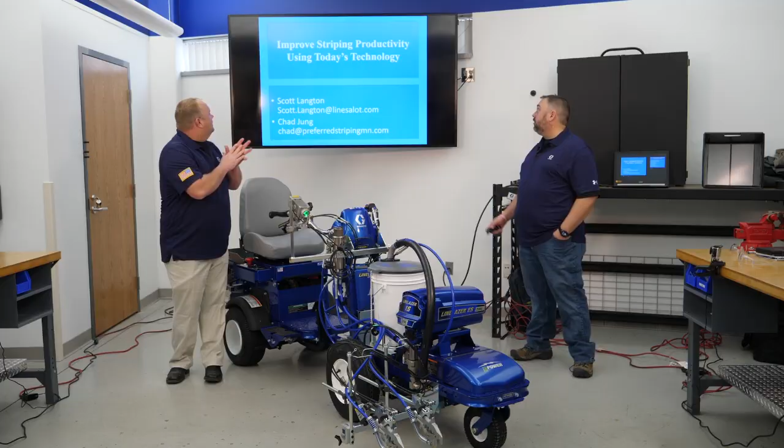So today, this is basically the outline of the presentation: improved striping productivity using today's technology.

We're going to cover a little bit on the electric stripers and drivers, the new two-color machines, the dot lasers, and the line generating laser.

Some of the other stuff we'll talk about is auto layout—big fan of that, used it for many years now. Auto guns, been using that quite a bit. Line drivers have been around a long time, but there's still people out there not using them. And then apps and data logging, that's new as of last year. We can now download all the information off the machine onto a computer pretty easily.

This is just an example of one job where we used the auto layout machine and auto layout lasers. In fact, this was a unique job because of the way the layout was done—we didn't even pull a tape measure on the entire job. We used the auto layout to measure our drive aisles, the laser to establish our baseline throughout the parking lot, and then auto layout to measure and divide.

This was one of the jobs where, at the end, we looked back and saw what an amazing feature the line generating laser could be for us—see how you could keep them so straight over such a long distance. Made a big difference, cut our time in half by using the auto layout. This was one of the first ones we did, probably 6 years ago.

So this next video is just an overview of the old way versus the new way. We did that for many years—we would follow that string line. Some people chalk line, some people use string line. That's just how we learned, using a string line.

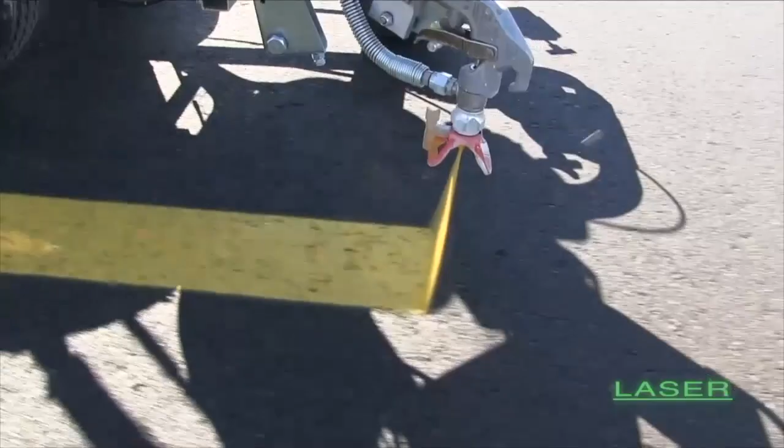This job was right here in Otsego, about 5 minutes from Graco headquarters. That string line there is obviously not a production-made unit—it's handmade, and we just had to come up with something because we wanted almost a quarter of a mile of string on one reel, and that's what we made.

A lot of people would probably use a chalk line to snap those lines with chalk. We actually just followed along a string line—put the string down, paint the line, move the string over, paint the next line. Now we've eliminated that, and instead of moving the string, all you've got to do is move your target.

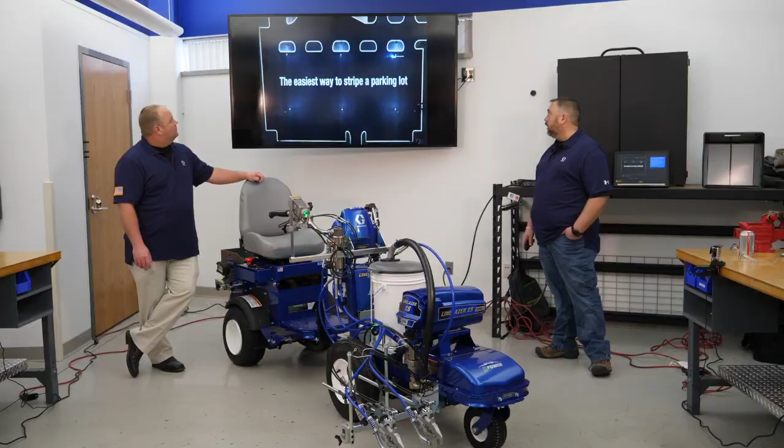This is a job we did—as you can see, it's 5 doubles, so there's no shadow box or target box at the end of this. I'm just using my auto layout marks to connect all these dots with the laser. You can see the sun's just starting to come up, but it's a nice, easy, quick way. And the quality improves—amazing. You get all your starts and stops.

Once again, everything that was done there was done with the auto layout. We avoid tape measures, string lines, and chalk lines as much as possible. If you have a guy on a job, you can put him on a machine with a laser, and every guy on the job is actually producing for you rather than having someone just there to move a string line or chalk line.

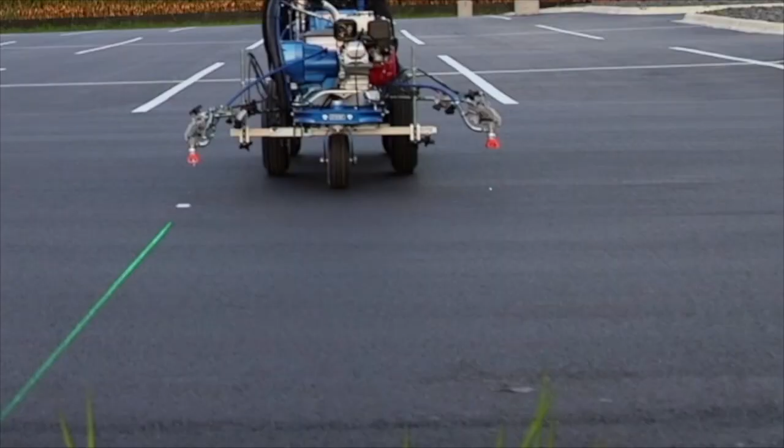The new line lasers—you can see right there in the bottom corner, that's me still striping the parking lot. That whole job was done, and I think I was in and out of there in like 2 hours, from auto layout to finished product. Perfectly straight lines, that's the key—that's what we're looking for, straight lines and even widths of stalls.

So new this year, electric stripers and line drivers. They're very quiet—you don't have any engine noise, no gasoline exhaust fumes. So when you're working inside a parking garage, you don't have to worry about setting off the carbon monoxide alarms. No engine vibration—the reduced engine vibration actually works hand in hand with the laser because it makes the laser more visible if it's not bouncing around.

Now the new electric stripers all come with the cruise control option. So if you want to go exactly 2.5 miles an hour, you can set the machine at that and press on the foot controls, and that's exactly what you're going to do—you're not going to go any faster, you're going to go 2.5 miles an hour. So you're going to get really good mil thickness. That's what you're shooting for—you want a perfect mil thickness, and you only want to be striping at that speed.

That's what that option gives you. It's also going to give you an eco mode on the new line driver. That's going to give you all the time you'll ever need.

I was lucky enough to use this machine for about the last 6 months. Never once did I run out of battery, never once was I underpowered. I could go up and down hills, it did everything I needed it to. And at the end of the day, I loved it because it was smooth, quiet, and it always performed like it should. Never had any issues with it.

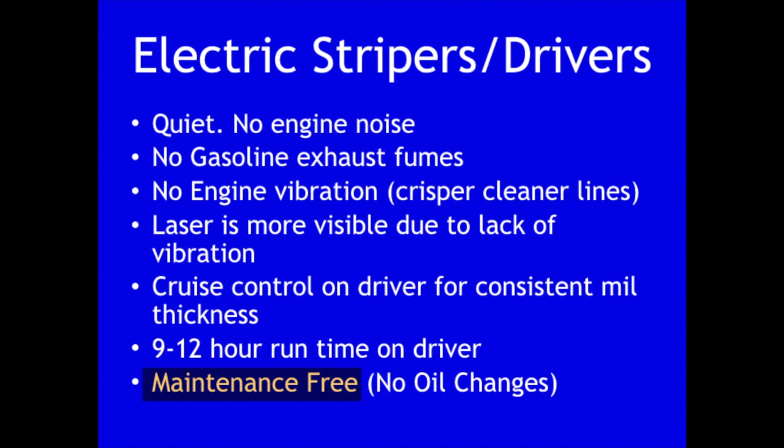So maintenance free, no gas, no oil. Just plug it in at the end of the day and you're good to go. One thing they did too is they took some technology, so every time you hit the brakes—and if you're doing singles, you're hitting the brakes nonstop—it throws a little bit of charge back into that battery all the time. So it's constantly getting a little bit, and it's using that all day long to help charge that battery.

So here's a quick video on it, some stuff we did indoors. That's it, it's running. It's as quiet as you can imagine. Loudest thing is the spray, the paint coming out.

Nice indoors. There's another job we did, 4 in the morning, had to have it done before sunrise. Look how close we are to that building—that's an apartment building, you've got people sleeping behind those windows. Yep, so no one woke up, no one turned their lights on, they didn't even know we were there. But in the morning they could park, so they were happy.

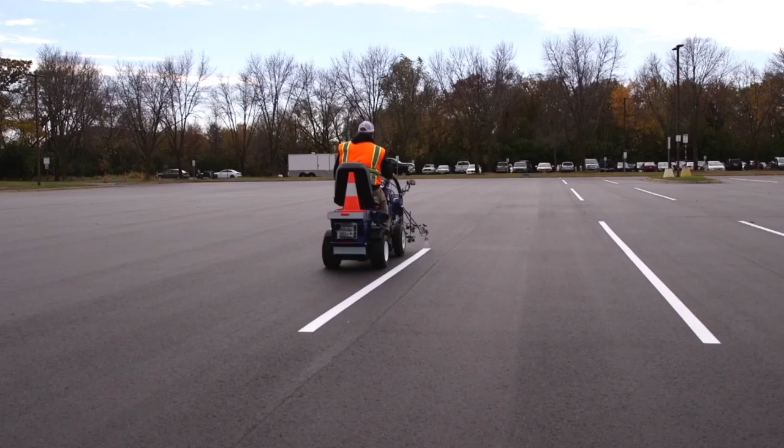Made a big difference. There you can see, middle of the day, nice and quiet. The laser was a little bit more visible because there's no vibration in it, which makes a big difference. That video you see right there, I think we stretched that laser out 5 doubles, so it was almost 300 feet, middle of the day, perfect sunny day.

There's another good picture of it, and I'm using cruise control in that one. I set the cruise at, I think it was 2.8 miles an hour. Set the machine up to paint auto gun, so it did 36 feet, gap 24. It did all the work for me, all I had to do is watch the box. Makes it nice and smooth.

So here's the two-color machine. The two-color machine is exactly that—it's got 2 pumps and 2 separate tank reservoirs, so you can actually run a white and a yellow, a white and a black. You could have 2 machines in there and have 4 colors, versus with a single color machine, you need to have 1 machine for every color that you're using.

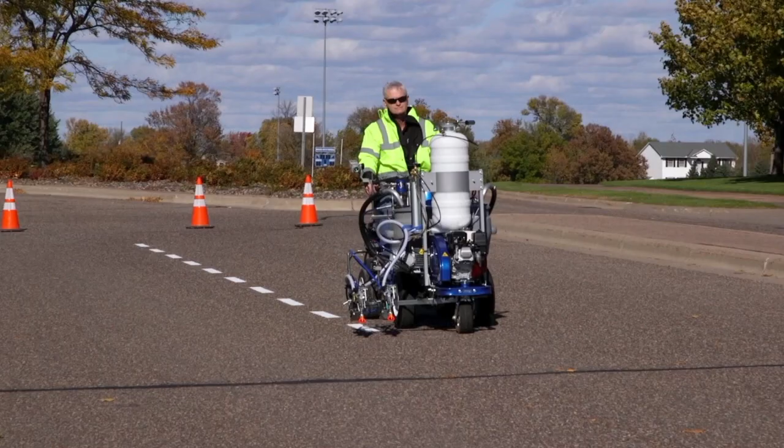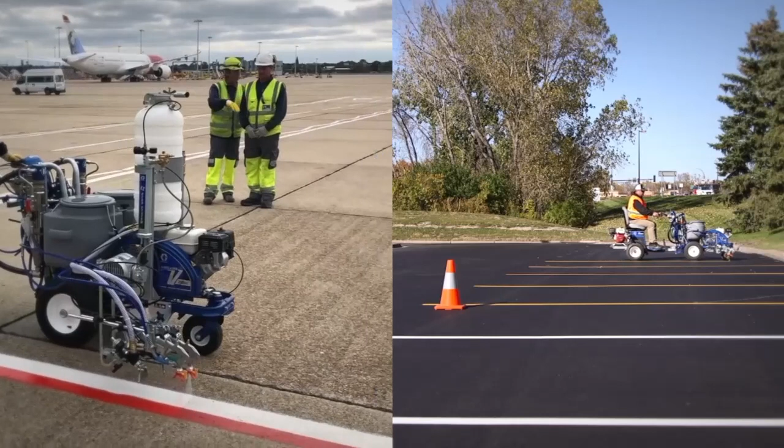The 2-color machine I found came in super handy because now I could downsize my trailer. Instead of running 4 machines, I got 2 machines, 2 drivers. That just eliminates that much weight, that much to haul around, that many things to go wrong. And you get to those jobs where, hey, they want 12 lines white, 12 lines yellow—it's right there. You're on the same machine, a couple of buttons, move a lever or 2, and you're painting a different color. You don't have to go back to the truck, swap out the machines, get a different color.

I know for years we've always wanted, hey, I want a black and a blue machine as a 3rd machine. This is an option now because you can actually have those 2 colors, keep them in your machine, and you're good to go the whole season. As well as you saw in that video, you can run that pressure bead system with that 2-color machine.

Dot lasers, it's kind of the first evolution of the laser. All that dot's going to do is put a dot on the ground and show you where your paint's turning on. But what we also use it for is to set up and align the head, and also to calibrate the machine and the auto layout for the machine. We'll cover a lot of this too in a couple videos.

Improve starts and stops—if I shut off that dot laser and put an average Joe behind that machine, I say, okay, line up on my mark I have on the ground and make sure you're lined up perfectly. Without the dot laser on, he's off by 2 to 3 inches every time. But now you turn the dot laser on, tell him to line up on that, you can't mess it up. It's a no-brainer, works perfect every time.

So here, starting the dot laser, how to set it up and align it to the head. I think we just have a short little video that kind of goes through that process. It's really, really simple—probably takes you about 30 seconds to set it up one time.

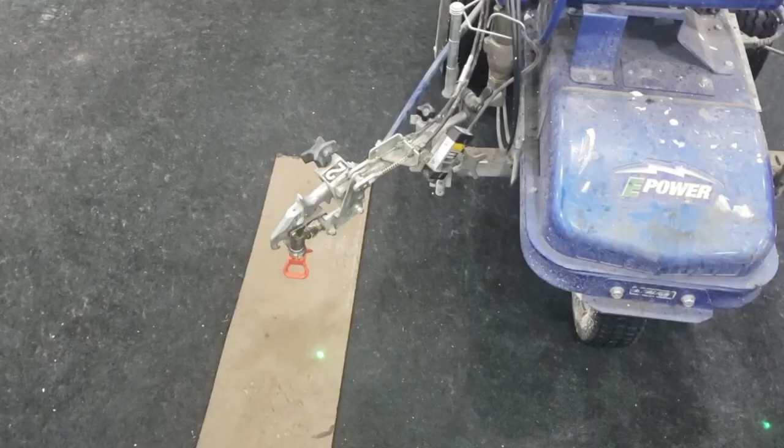So basically we just walk through on how to do it. It's a simple process. Set your machine up to put down a dot. You come over to your auto layout mode and turn on your number 2 gun, which is what I'm using here. Simply press the button and you're going to get a nice 4-inch line. We're set up for a 4-inch line, that's typically what we do.

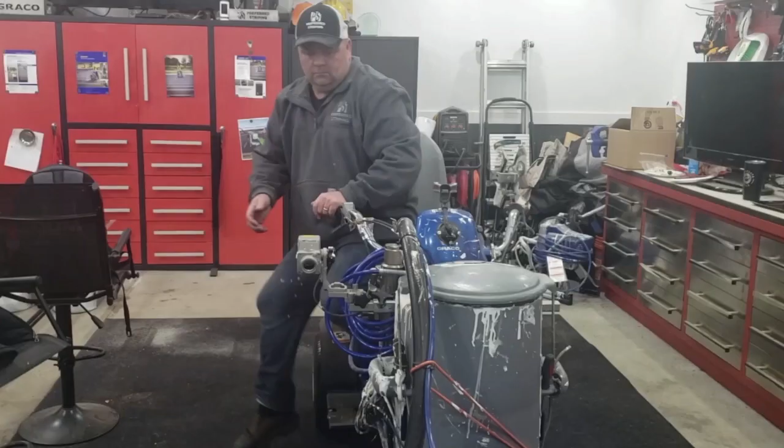Now we just go down, hop off the machine, adjust your dot laser. You want to line that dot up center of that mark. Once you get it lined up, then you're good. It's just a matter of, you can see the dot slowly move into the center of it. It's a 4-inch line, center it. It's that simple, and once that's lined up, you're good.

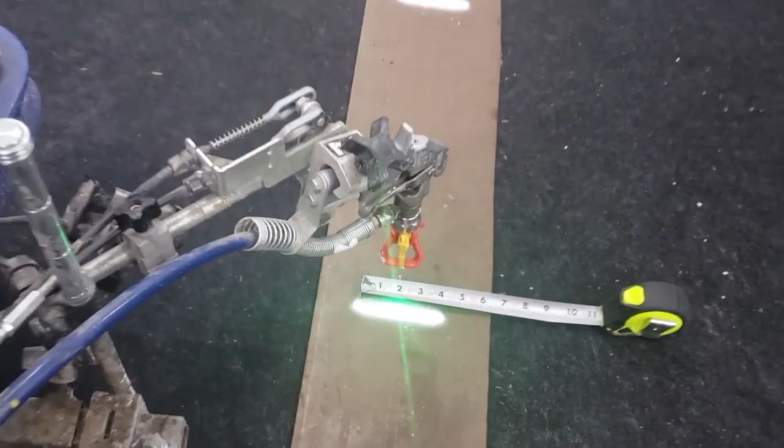Honestly guys, if that takes you more than a minute, you're doing something wrong. It's a real simple process, and unless you bump that laser, that dot should stay set up for you weeks at a time. I mean, you shouldn't have to do that. If you raise the gun, you'll have to readjust that dot. But if you mount that dot laser to the arm of the gun, you can swing that gun in and out, and it'll stay set up right on that exact same point.

Secondly, using the dot laser to calibrate the line generating laser. Basically what you're going to do there is just set up a baseline, and you're going to use that dot as a reference on the ground to show you the path that your machine is rolling.

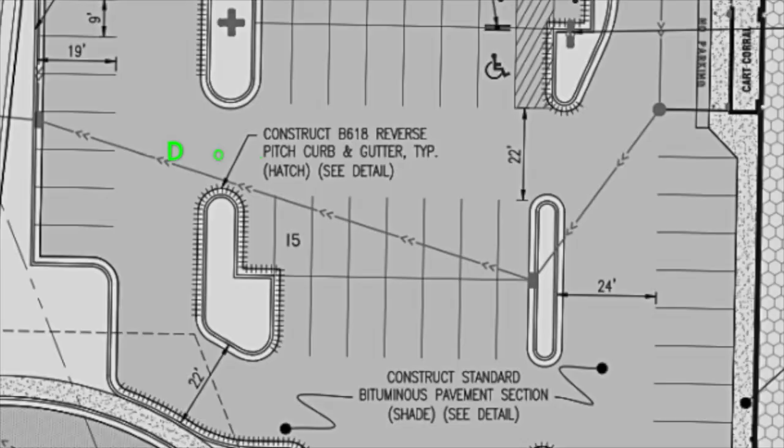Same with using it to calibrate the auto layout. I think this next video will kind of walk through that. But again, that dot just gives you that reference point on the ground to where the machine is going to spray.

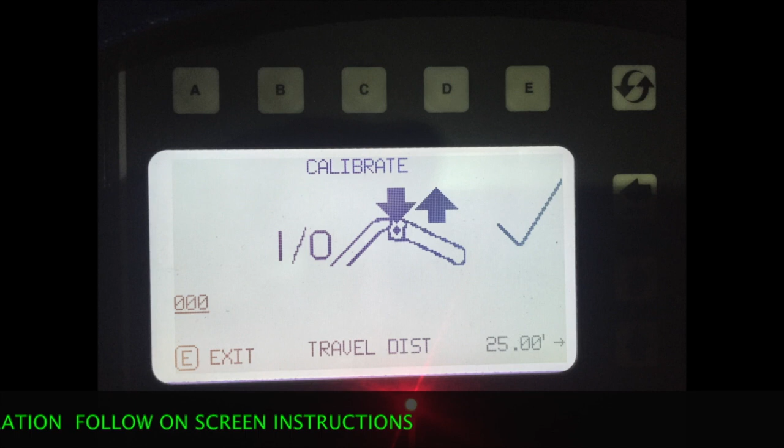Your machine's automatically set up. When you go into calibration mode, it's going to be at 25 feet. Do I need to go 200 feet? Absolutely not, go 25 feet. And you can calibrate it as good as you need to.

This right here, we just pulled the tape. We pulled it out to 50 feet. We're going to start at 50, we're going to end at 25. We're going to make sure that dot rolls perfectly straight on that 50-foot tape measure. By the time we're done there, it's calibrated as good as you ever need it. It's going to be calibrated really close to what you're looking for.

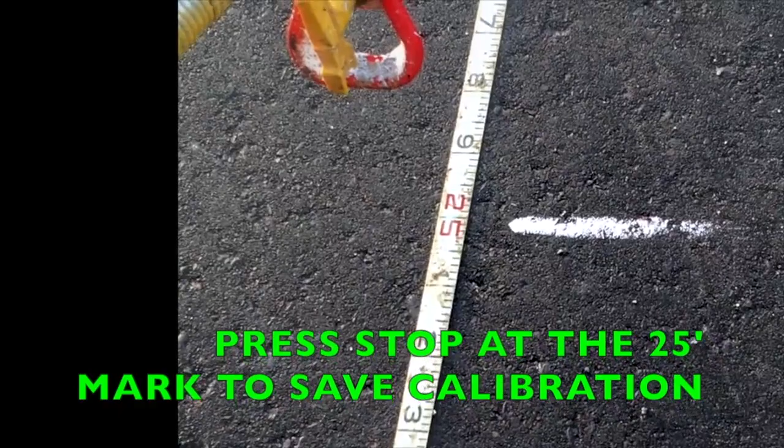So as you can see here, we're getting close to the end. If you look closely, you might not be able to see it, but you can see it gets right on that 25-foot mark. That's it, machine's calibrated. People ask us all the time, how often do I need to calibrate my machine? I tell them I do it maybe once a month, once every 2 months.

Calibration to me isn't key, the key is measure and divide. That's going to get you what you need, and we'll get into that. But again, here we're just throwing some dots down just to check where our calibration's at, make sure it's throwing a dot down. I think I had it set up to throw a dot every 5 feet. So there are dots at 25 feet, right where we want it.

This is the key for the dot laser. It's going to improve the accuracy of your starts and stops. I don't care if you're a veteran or a new striper, it's a training tool. You have that visual indicator on the ground that shows you exactly where your paint's going to turn on. So when you hit the button or pull the lever to start it, when that dot's on your mark, you pull the trigger and it's going to start painting right there.

So there's no guesswork. I've had guys tell me they lay shingles down at the start of every stall so that they don't have to worry about hitting that mark. It's going to completely eliminate that step of the process. This is just a short little video clip to show you what it does. I mean all that dot laser is doing is putting a dot where your paint's going to come out.

So now you know, it's a simple process. But in the past this was a big deal because we didn't have that. And without having that, you'd be missing your mark, so they created the shingle - they'd lay it down or whatever you're using. But now we have the dot laser, so it makes a huge difference on accuracy.

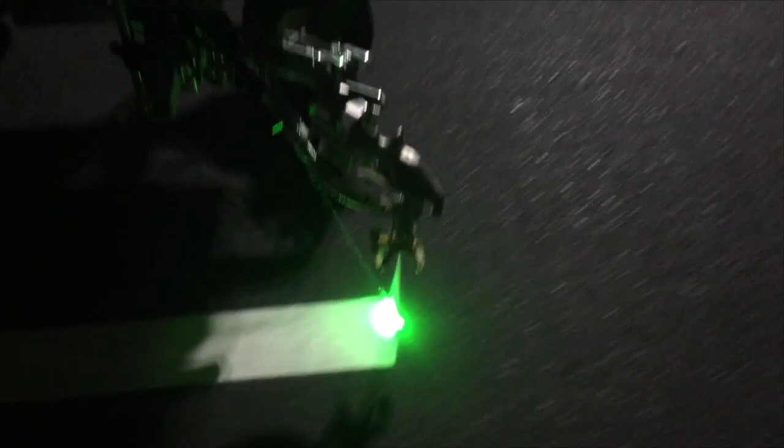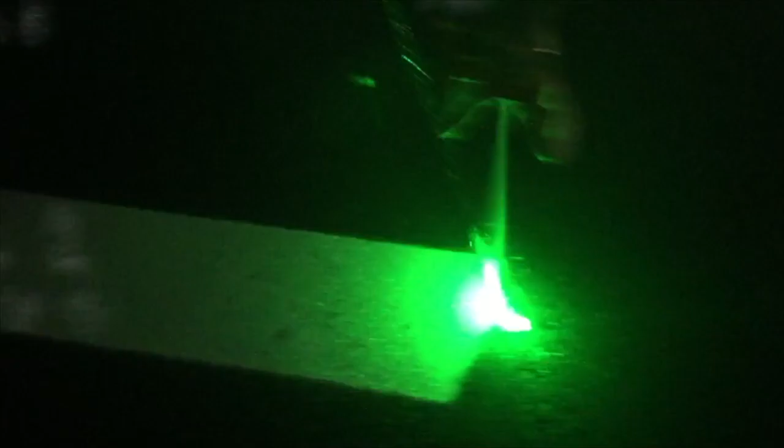As you can see, you can really fine-tune your stops and starts with this dot laser. You know exactly where it's going to turn on and exactly where it's going to shut off. Makes a big difference, especially if you're new. If you've been striping for years, you can hit your marks without it, but the dot laser still makes it a little bit easier.

The big dog laser, the line generating laser, is the one that's going to actually project a line on the ground. This line generating laser that we've been using for the past 10 years has completely eliminated our need to carry a chalk line or string line with us in the trailer. It's a 100% replacement for the string.

It increases productivity. Your restripes and new jobs are going to be faster and the quality is better. Those two items right there, finding a product that can improve both your quality and your productivity, that's kind of like a unicorn. They just don't exist very often.

Our experience, it's about 30 to 60% faster than traditional striping methods, and that's going to vary based on the size of the job. Makes amateurs look like professionals, or new employees. And it's a one-man operation. So if you have 4 guys on the job, you should have 4 machines on the job and 4 guys laying paint at the same time.

Another thing that's huge with the lasers, wind's not a factor. If you're pulling a chalk line and you've got, say, 20 doubles to chalk using blue chalk, by the time you're done on a windy day you look like the Blue Man Group, covered in it. It's a mess, blows all over the place. The laser eliminates that. Wind's not going to blow the laser, it's never going to move it. It's always going to be perfectly straight every time.

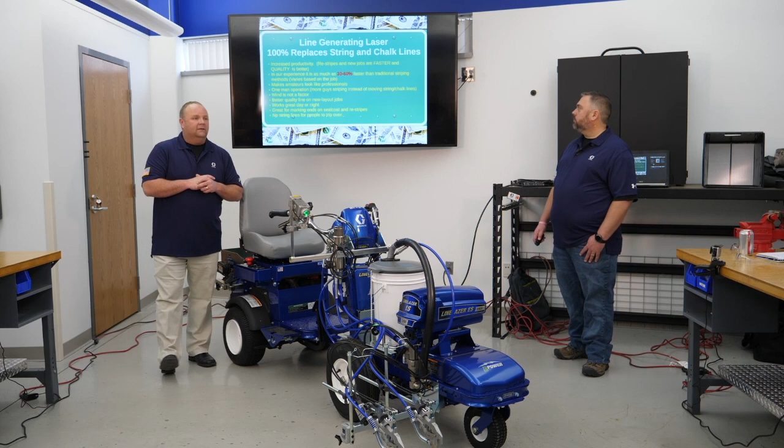No strings for people to trip over. If you're doing a job during the day with strings all over the place at a shopping mall or grocery store that's open, people walking through there, the last thing you want is them tripping over one of your string lines. I've actually seen people try to step over my laser at night, which, there you go, they don't need to do that, obviously.

So this is the big thing here, time savings. Time is money. With a laser, you're going to be running a one-man crew. What you need is a line generating laser, a shadow box, and a target - or the shadow box is the target. Actually, for every guy you have striping, you should probably have 2 targets, one striper and a dot laser. You have all that on your machine and it's ready to go as soon as you get to the job. You don't have to bring anything else with you.

The conventional way of striping, you need a lot, okay? You have to have a string line or a chalk line - people use both - and you got to have 2 or more stripers. A lot of people we talk to, they got one guy who does all the striping. Well, good for that guy, because the other 2 guys are running around moving string line and chalk line all day long. Get those guys off the chalk line, get them on a striper.

It helps to have a perfect non-windy day. The quieter the wind, the less mess you have. A nice flat parking lot - that laser will roll nicely through the hills. You can see that as you're going through it, it'll still see it in the box nicely, and it's 100% perfect layout. When you're chalking lines, if your layout's off, you're going to end up with inconsistencies, whereas if you're just doing the laser, you can set the box at the end and that line will be perfectly straight throughout.

Ideally when you're lining up with a chalk line and you have a lot that has 5 rows of parking that line up, you want to look down all 5 of those rows and you want them to be perfectly parallel with one another. If you're chalking those lines individually and one of your layout marks is 2 inches off, now your lines are going to be inconsistent when you're looking through the parking lot. And it makes a big difference in the finished product.

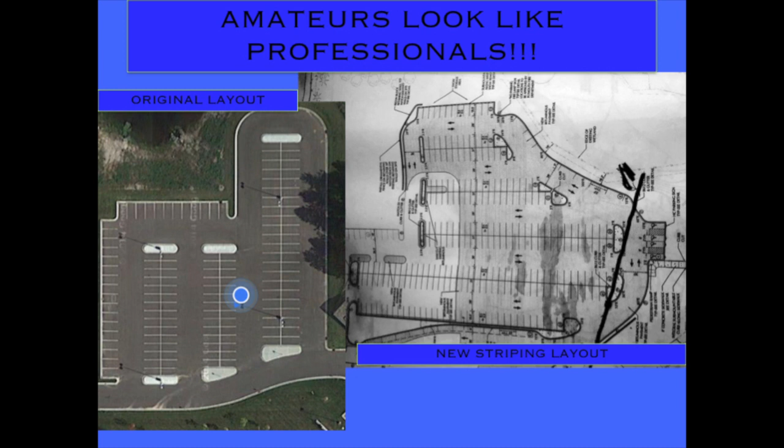So now I turned her loose on the big lot. I'm like, here it is, there's the laser, same idea - keep the laser in the box, hit your starts and stops. Her first day on the job, that's the final product.

I've talked to a lot of guys over the years that would have a guy on a job for 2 years and probably wouldn't let him stripe that parking lot. But you give him a laser and send him to town, you can't screw it up, because that laser is going to show you exactly where that machine is going to go. So as long as you keep that laser lined up, you won't have any issues keeping the lines straight and putting the lines down from mark to mark.

It's one of those things too where I felt comfortable with today's technology to turn her loose on that lot. No blackout needed - she didn't need to do everything she did there, and it turned out perfect. Here's another example: she's 15 years old, never been on a striper. I took her to the job and said, here's what we need to do. I turned her loose - this line's 250 foot long, middle of the day.

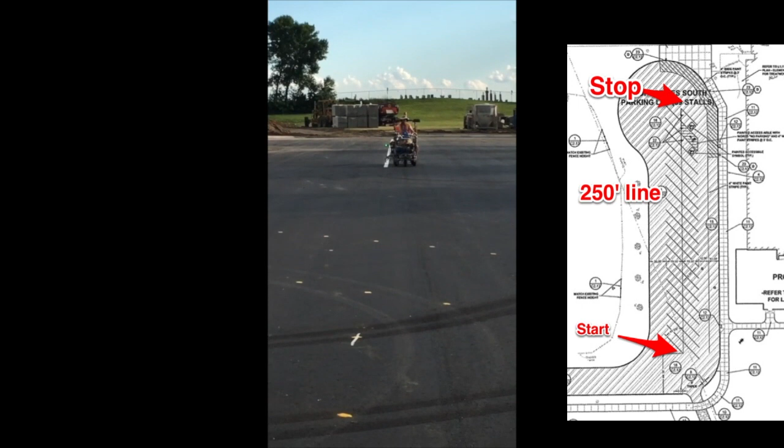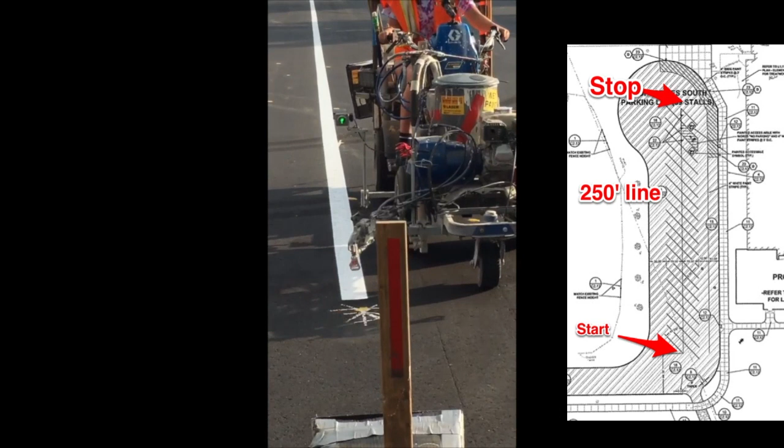You can see there's not a cloud in the sky. I felt comfortable putting her on the machine and telling her to keep the laser in the box. She's like, are you sure? I'm like, no, but you're going to do it. And when she got done, you'll see at the end of this picture, she painted a 250-foot line perfectly straight. First day on a job, okay?

That, you just couldn't do anymore. If you were doing it the old way, I'd have never let her paint that line. And this was her final product. She did that whole job that day, first day on the job, and it turned out perfect. Customer was really happy. It was a good final product.

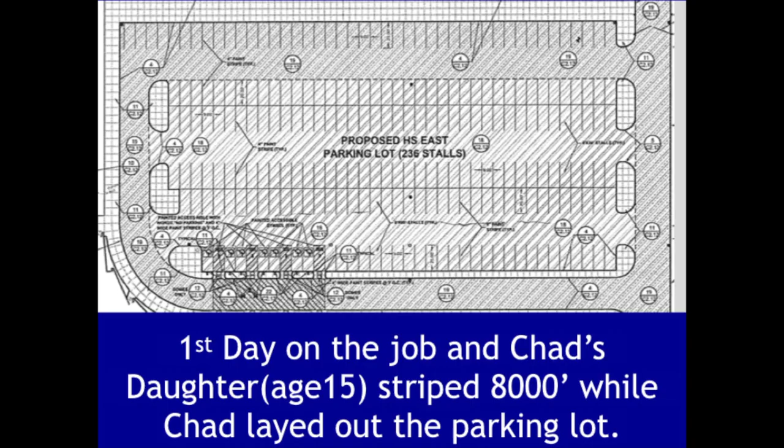So here's another example of a job we did probably 5 years ago, the auto auction in Brooklyn Park. 1,356 stalls, 41,000 lineal feet of striping. We got the call on Saturday afternoon that they wanted us in there Sunday night to stripe this lot. 11 o'clock Sunday night, they wanted us there. They needed the lot open at 7 a.m. Monday morning. That gave us 8 hours to do this job.

We went over there with 3 guys. Chad and I did the layout on it. We had 1 guy striping behind us, and it was all we could do to lay it out fast enough to keep him busy striping behind us.

Secondly, with this job, with the deadline that we had, it was about November 20th in Minnesota when we did this job, late season. It was 25 degrees that night, and it was a 30-mile-an-hour wind. With that wind blowing, if we would have had to stretch a string line or chalk line across that lot, I'm 100% confident we would not have been able to get that job done. There is no possible way.

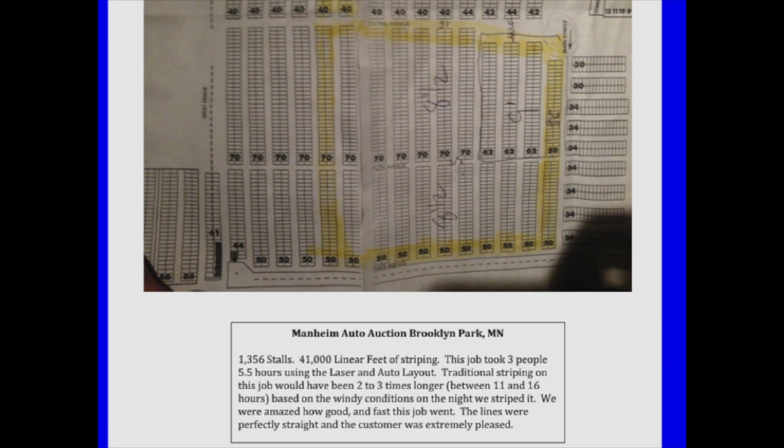Traditionally, if we would have striped that without a laser, that took us 5.5 hours with 3 guys. I would guess it would take between 11 and 16 hours with the same 3 guys running string lines and chalk lines. Here's the next morning.

I went back at 7:30 in the morning to take pictures. You can see it's already full of cars. But again, the lines are nice and straight. No issues with that, everything laid out really well. The customer was extremely satisfied because we were able to meet his deadline on short notice.

CarMax Brooklyn Park, another good example of where we use the auto layout as well as the lasers. This job, not nearly as big, 594 stalls, 350 12-inch numbers, 47 16-inch letters, some arrows, some handicaps. This job took us 3.5 hours with 3 guys, and that was 2 coats of paint on everything.

Here's the job. You can see how the numbers are all lined up. We used the auto layout to lay out the parking lot. Then after we had the stalls laid out, we came back and used the auto layout to mark the location of every number so that every number was perfectly centered on the stall.

A lot of people ask, well, what about all the extra auto layout marks that are on the ground when you're done with that? If you use that mark, you can actually set the number right on the mark and cover that mark with the number so that you don't have those extra layout marks when you're done.

One-man operation, more guys striping, get them off moving string line and chalk line, get them striping. No more string or chalk lines to deal with. I'm telling you, that was the one thing I hated about striping. Who wants to move the chalk line or string line? Nobody would raise their hand, right? That's the last thing you wanted to do. So if that was your job for the day, you weren't looking forward to it. Now you can put that guy in a striper, makes a big difference.

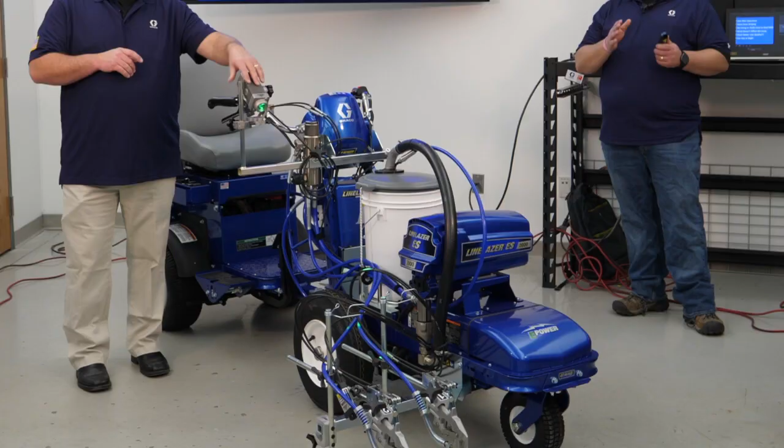If you're ever having trouble seeing the laser during the day, you might have your laser aimed wrong. The lens on the laser is a parabolic lens, so the center of the line is the brightest part. You want that center pointing directly into the target for best visibility during the day. If it's pointed more towards the ground, with just the tip of the laser line hitting the box, it'll be a lot harder to see in the sunlight.

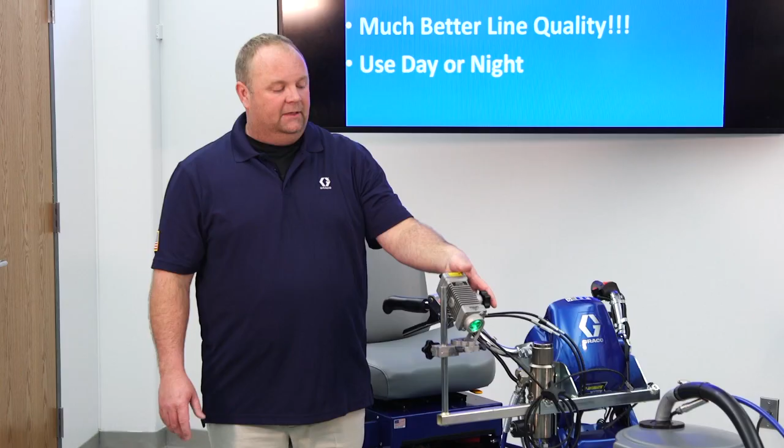That's what he's talking about. If it's pointing down like this, it's going to be too short. You will never see it in that target, even at 36 feet. Tip that laser up, get it almost level to the ground. That's going to create that line, and you should see it every time. That's the number one thing we see with people.

It's pointed at the ground. The first thing people say is, hey, I can't see the laser, it doesn't work in daylight. No, it does. You just got to tip it straight up. You got to point it at the ground, then bring it up some, and you'll be able to see it every time. We've never had it fail on us.

The only time I've actually had to make an adjustment is early morning or late evening when the sun is directly behind me. You can't paint directly towards that box with the sun behind you. You just have to turn around and go the other direction.

Here's a quick video comparison we did.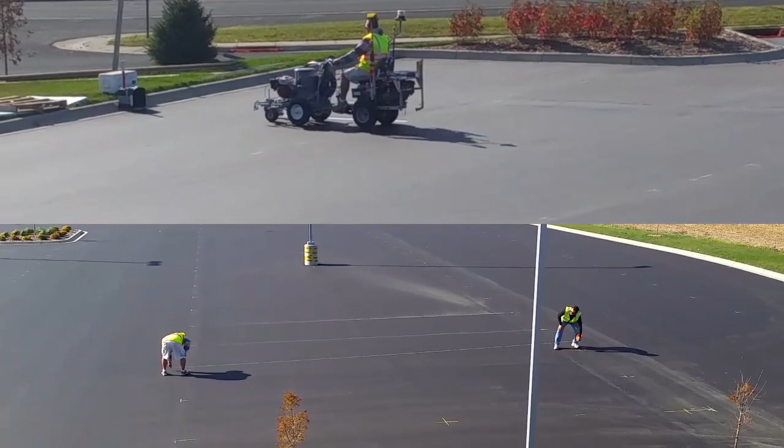Better quality, faster, and look at this. As you can see, it's a really windy day, and that chalk's blowing all over the parking lot. So by the time they've chalked 2 lines, we've already striped almost 2 lines, right? We're moving on, and it's 1 guy versus 2 guys. So you're instantly painting parking lots, which is where you want to be.

You get paid once the money hits the asphalt. That's the key though, you've completely eliminated that entire step. No matter how fast he can stripe it, he still has to chalk first and then come back and stripe everything. So we've eliminated one entire step from this whole process.

When we got done there, we looked at the two lines. The line that you followed on the chalk line honestly looked horrible compared to the laser line. And I don't care how good you are, the laser will be better every time.

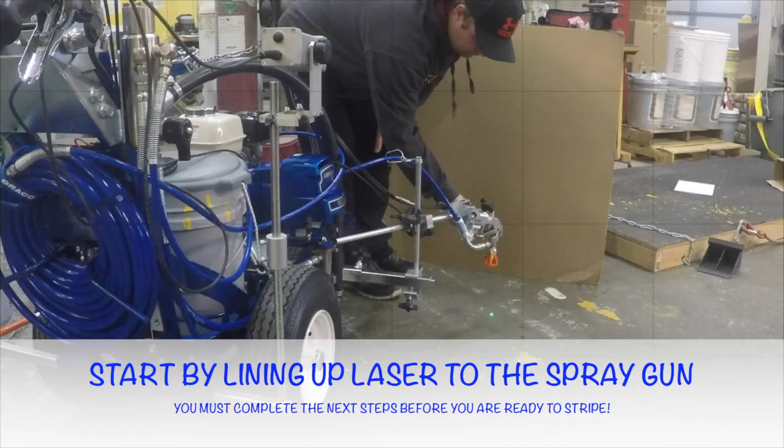The next video will walk you through the steps of how to set up the line generating laser, how to get it set up so it's true to the path the machine rolls. Right now we're assuming we've already got the dot laser lined up, which we already covered. Now you're going to want to get that line generating laser lined up on the same path as that dot laser. So we'll just pull that laser out and line it up to the head, line it up to the dot.

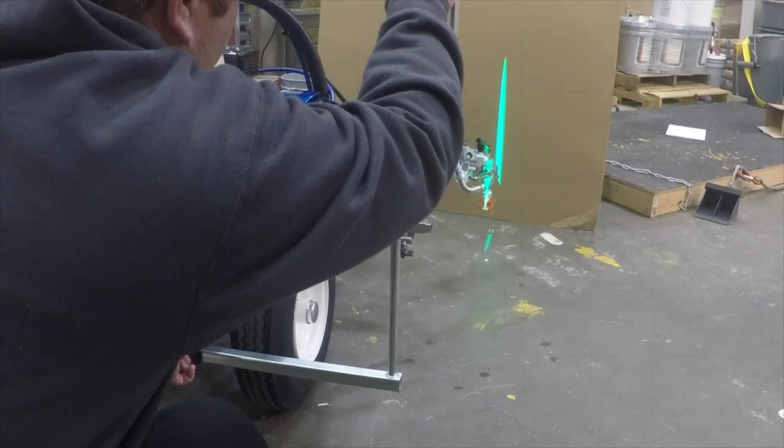Everyone asks us, how often do you calibrate your laser? I tell them every time I bump it. The best thing to do is when you get to a job, check your laser first thing in the morning, and then you're good for the rest of the time. Every time Rich runs into something is when you adjust it, every time you run into a light pole, every time you bump it. We usually check it first thing in the morning and then go from there.

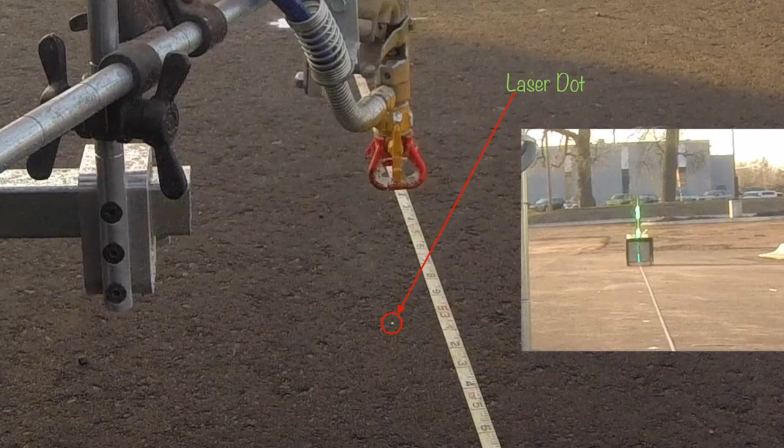So next thing you're going to do, now your dot laser's on here, you want to get that machine rolling on that line. But if you notice the picture on the right, we're actually following the laser in the target, not the dot laser on the baseline we established. As we travel to the halfway point, you'll see the dot is about 3 inches off that tape. So if you start painting right now, you're going to have an arc in all your lines that's about 3 inches off.

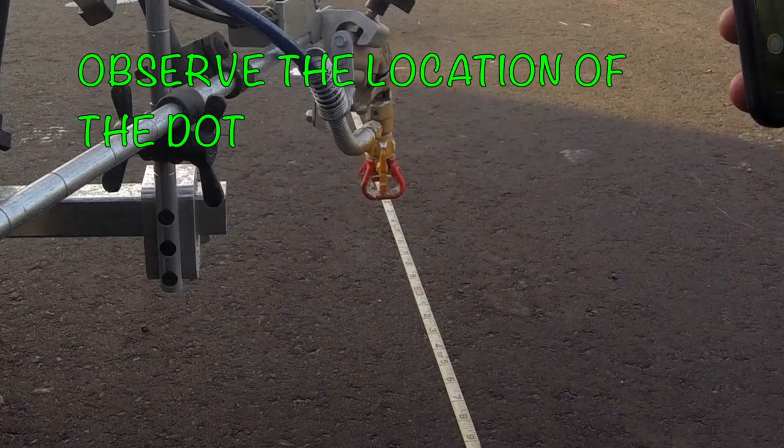So now we're going to go back to the beginning. We're going to adjust that laser always in the direction that the machine is off. So if that dot's to the left of your baseline, adjust that laser in the target to the left about that same distance.

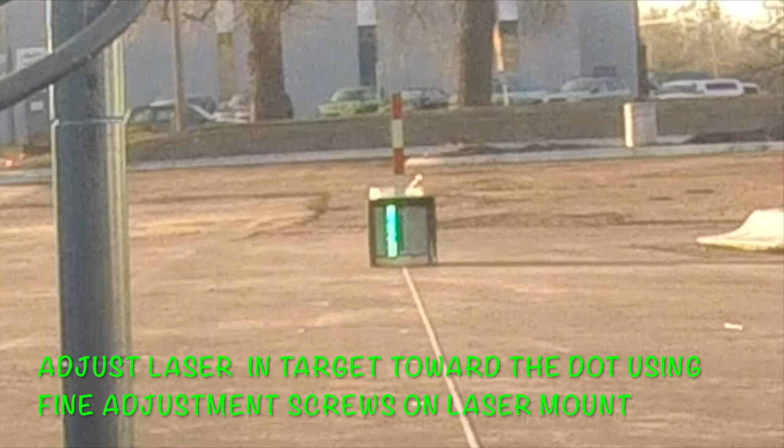Once you get it set up, you're good for a long time, until you bump it or hit something with it. To finish it off, repeat that step again. You can see our dot laser is following that tape perfectly, so we know our laser setup is done. If on that first adjustment you're still a little off, repeat that step one more time. First time you do it, it might take 3 or 4 times, but once you figure out how to do it, it's about a 1.5 minute long process.

If you're working at night, a really good way to calibrate and set up that line generating laser is to line another laser off of one of your other machines up in the parking lot. Use that as your baseline, because now you're calibrating to a perfectly straight line rather than a string line that could have a little wiggle in it. So if you line it up off that laser, you're going to get a perfectly good calibration every single time.

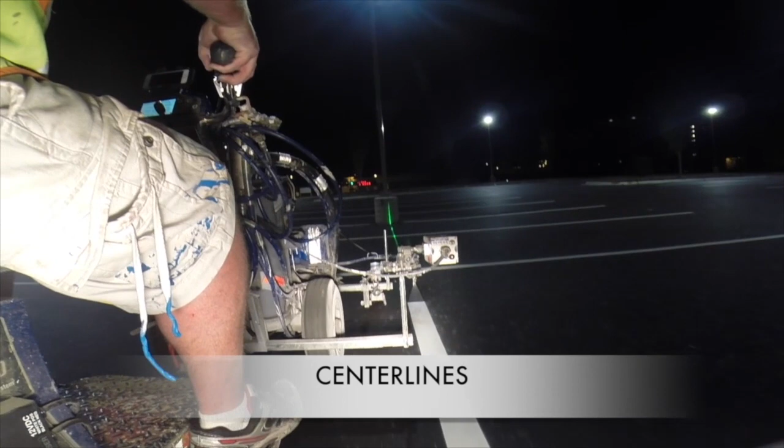So this is just walking through a lot of the ways we're using these products. We use it day or night, you'll see a ton of this in the video. Right there, center lines can be processed. So in a lot of scenarios at night, you don't have to use the target.

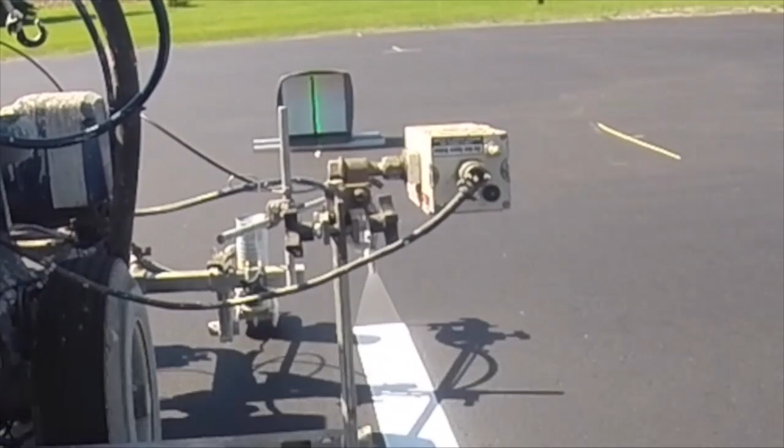Here's a great video showing you during the day. That was 3 doubles long, perfectly sunny day, couldn't ask for a nicer day than that. I could see that laser all day long at about 250 feet.

No more chalking singles, no more setting up string lines for singles. Your string line is built into the machine, I can't stress it enough. If you have a new employee, that laser's on the ground, you can show them exactly where that line's going to go before they even pull the trigger to paint. Takes all the guesswork out of it.

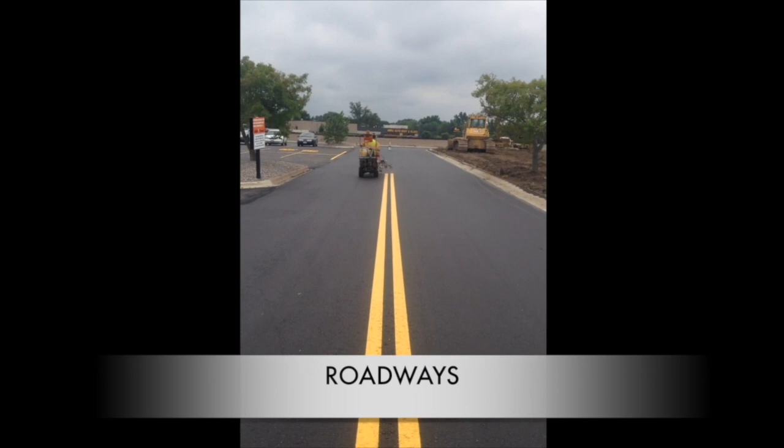These are just tons of examples. We use it all the time, every single day. We never shut it off. If we're striping, that LineLazer's on.

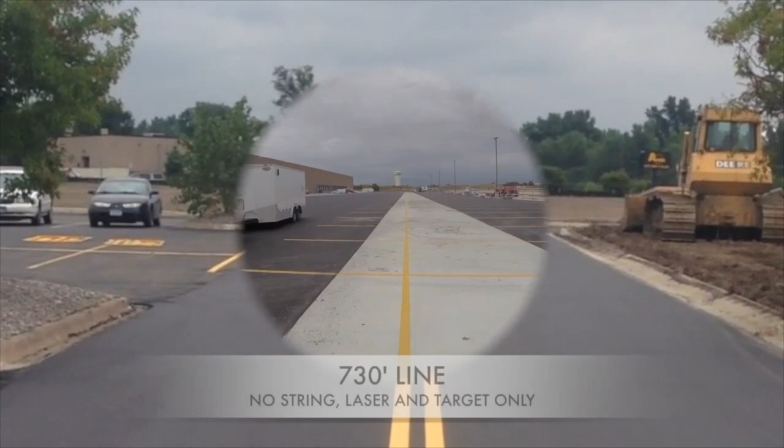There's our big one. We were impressed that day because it was the longest line we ever painted, 730 feet. That was the middle of the day, not at night. We placed the target at the end, and that's when we figured out the laser has to be almost level to the ground, because at first we couldn't see it. That's how we figured that out, so we tilted the laser up. That was really early on in our experience with the laser — we had probably only been using it for 3 or 4 months at that point.

As veteran stripers, we'd been striping for a long time, so we were nervous about painting that line without having anything to follow other than that laser. I actually made a couple dry runs at it, and as soon as you learn to trust that laser, if you can keep it in the box, you don't have to worry about it. As long as you have your calibration set up before you start, that line's going to go exactly where you put it.

I prefer working at night — no traffic to deal with, no one's in the parking lot, and I can see my laser better. So a lot of the stuff I do, I can get in and out before the customer even knows I'm there, and that's why you see a lot of my stuff at night. Sun's just coming up there, but you can see the laser so well, nice and easy. Don't have to worry about people walking over your paint or stepping in it. That's one thing you'll see us do too — we run two guns, one on each side, so you can work around cars much better that way.

So auto layout, you must believe. There's a lot of people that have auto layout — I run into them at the shows all the time. I'm like, do you have auto layout? Yeah, but I don't know how to use it, or I don't use it.

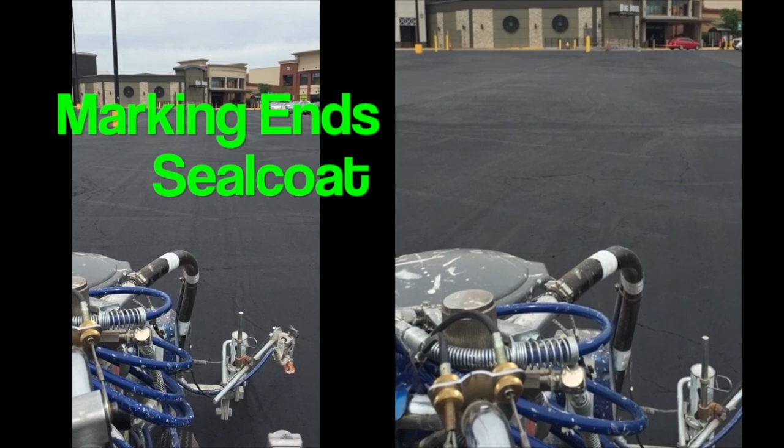Here's just an example using it to mark ends. If you look way off in the distance, it's not a great video, but we have a target in the upper right corner of the right video, and we're following that, and we're using the machine to just put down a mark where every stall is.

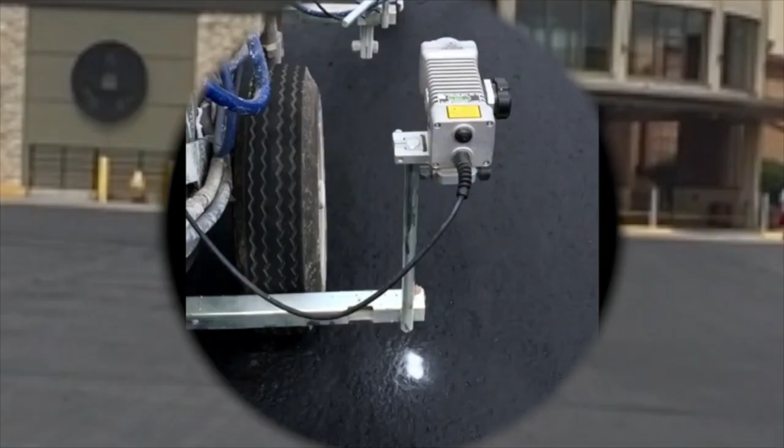We were at this job, and the end lines were very irregular. So some of the lines were a foot longer than others, some of them were a foot shorter. And you can see this in my great editing video here. As you can see, the old existing line was probably about 3 to 4 inches past what the mark was.

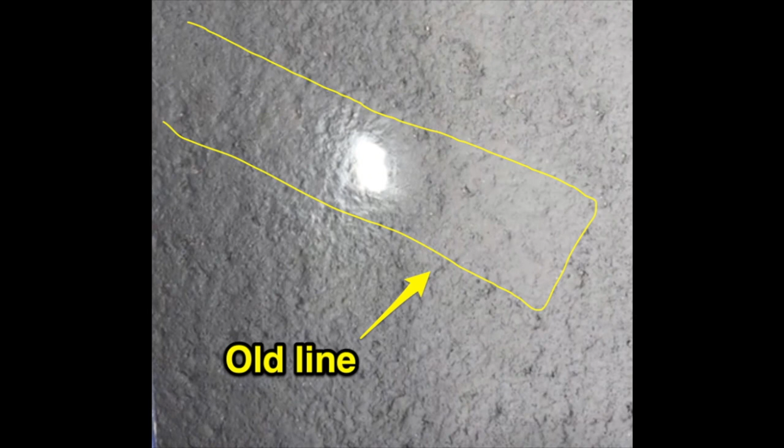But when we got done, all of our ends were perfectly straight. So you can see the old line, like I said, it was probably 3 to 4 inches longer than it should have been. So when we were done, we left that job with perfectly straight ends, which is what you're looking for. That's one thing all of us stripers look at, right? How are the ends and are the lines straight? That's what we look for. The ends being straight is almost more important than the lines being straight, unfortunately, because that's the first thing you see when you pull into a parking lot.

So next we're going to talk about how to use the auto layout to measure and divide. We have a video that'll walk you through the layout process of a basic parking lot from start to finish. The lot that we use is probably about like 95% of the lots you're ever going to lay out.

So at this point, the machine's already calibrated, it's ready to go, and we're just going to measure and divide from 2 points. So here's the lot: 9 foot by 18 foot stalls, 24 foot drive aisles, pretty basic layout.

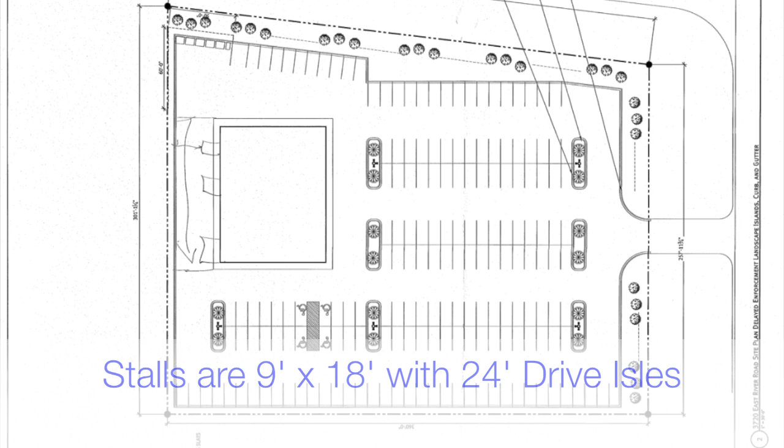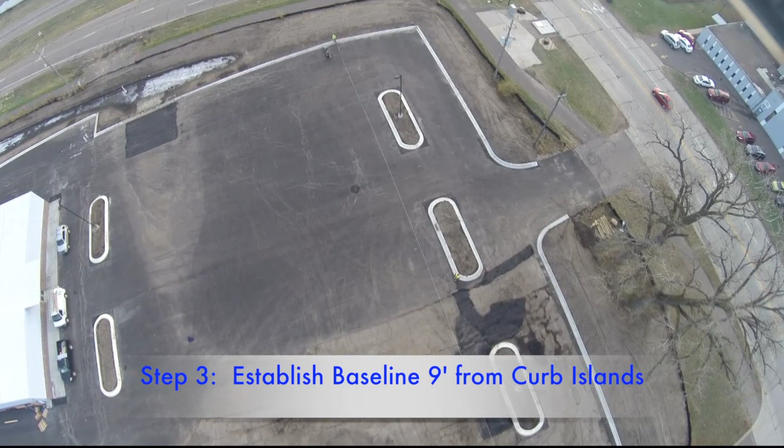First thing we're going to do is establish a baseline in the lot. So we measured 9 feet out from the curb and ran our baseline on that first stall line. In this case, we actually ran a tape down there so visually you could see our baseline, because we wanted you to see where we started from. We ran that tape so you could see it.

So that's what that tape was doing there for us, and we created all of our starting points. We made our 24-foot marks, our 36-foot marks, our center lines. All that was created by pulling that tape. You can see us as we're going back.

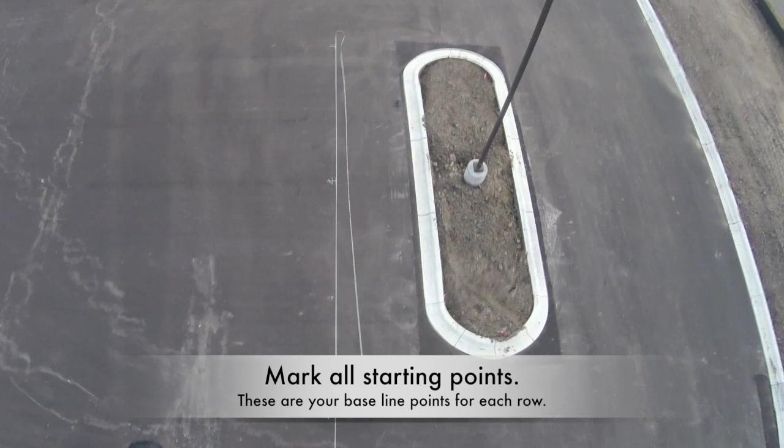We do T's and C's on the center lines, so we know exactly where all of our starting points are. That just squared up our lot and got our starting points for all of those doubles.

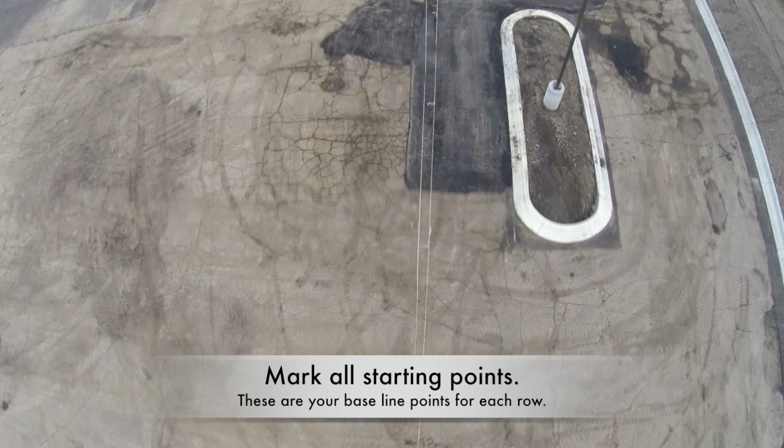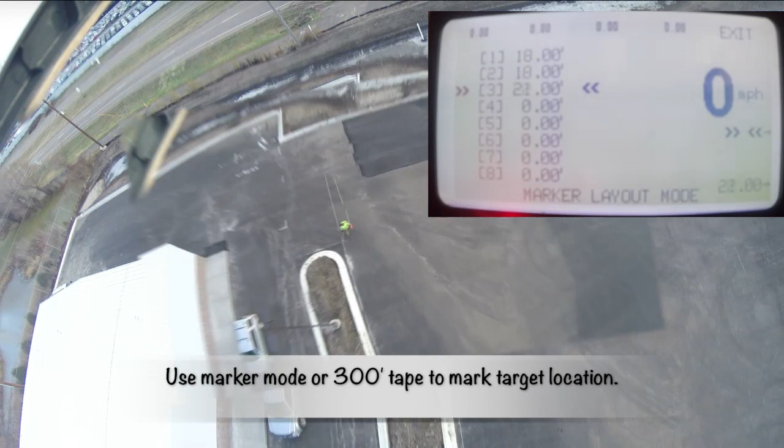Next thing we're going to do is recreate those same marks on the other side of the lot. The only thing different on that side is you need a mark that shows the distance out. We don't need to establish a baseline, just a mark we can set our target on to line up the two marks from.

And you can do all this off the machine too. You can set the whole thing up using the marker layout mode, so you can set it up to do 18, 18, 22. You can do all that off the machine now. It's all in there, you just got to go into marker mode on the machine.

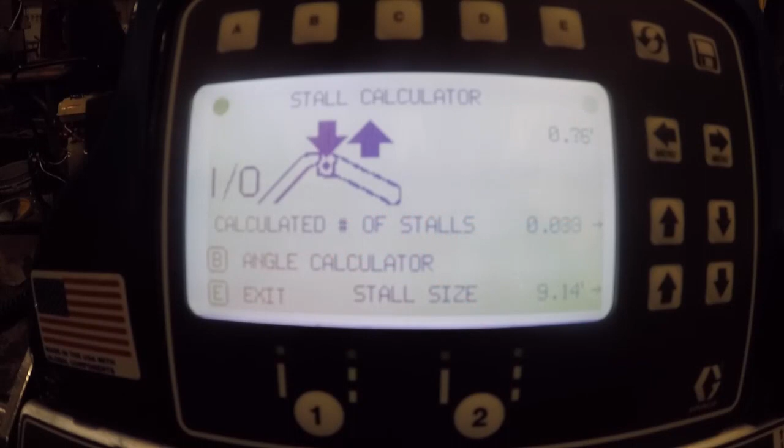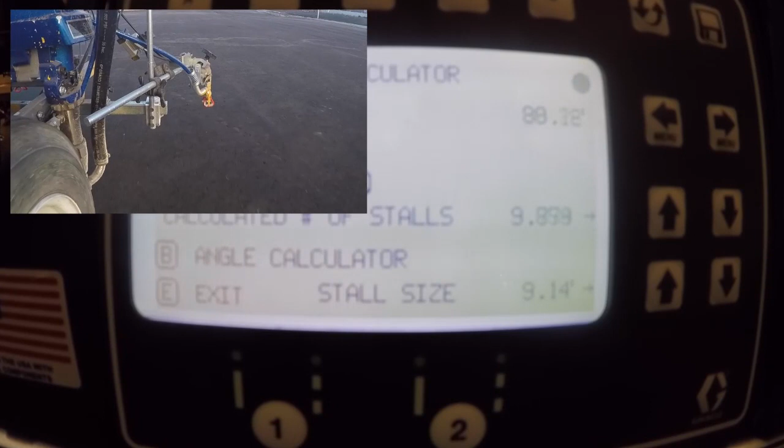Now we have our two points set. We're going to put a target on one end and measure from our first starting point. We have the machine in measure mode right now, and we're just driving from point A to point B to establish a measurement for that entire lot.

Once we have this first measurement, we're going to use that one measurement to lay out every other parking stall in the entire lot. You can see it's counting up, we're coming to the end, there's where I have my target placed, keeping it perfectly straight using the line generating laser, so you know that's a nice straight line.

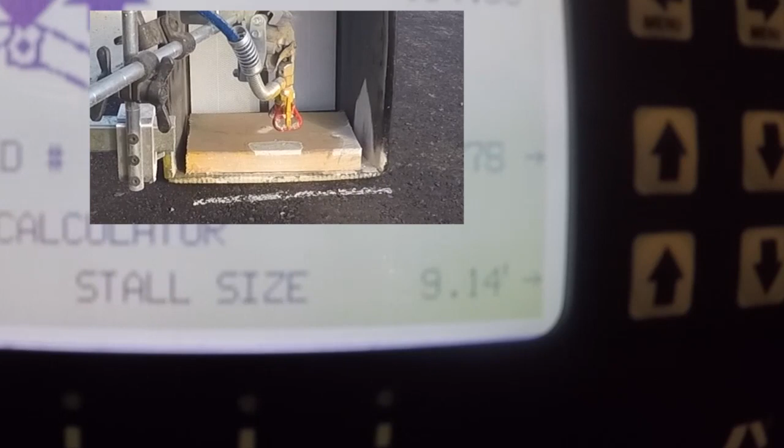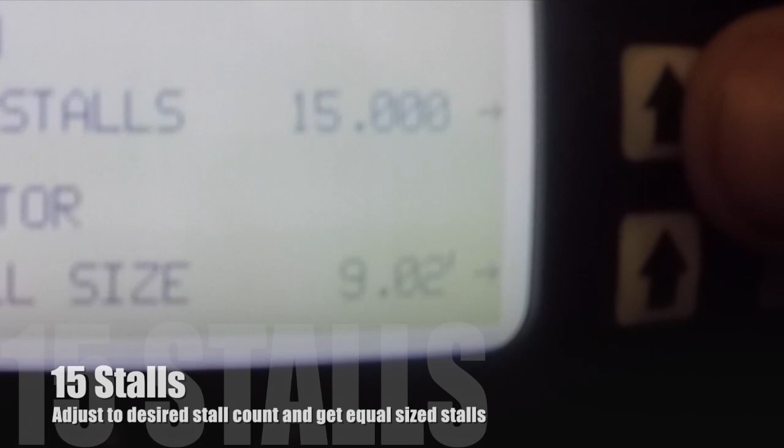Now we save that measurement in our machine and use it for everything in the parking lot. That way every line is going to line up perfectly straight, and everything gets laid out off of that initial baseline.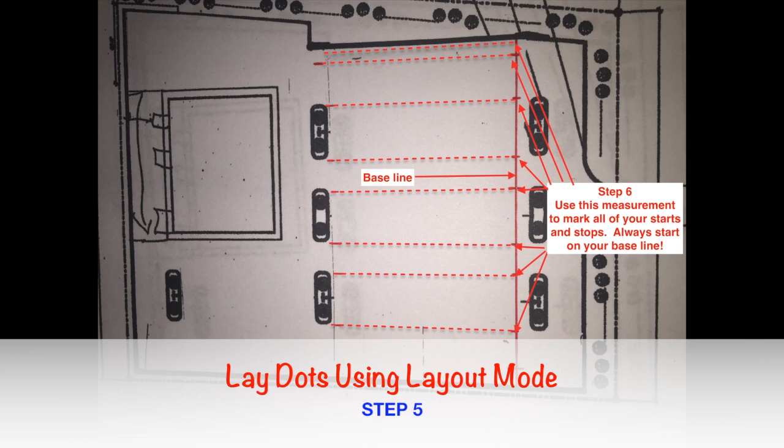So now we're using that measurement and measuring every stall off of that baseline, using that 9.02. So when we lay that out, every single mark is going to be in line with one another, measured off the exact same point in the lot.

So now we go back to the layout mode, and it's simply putting a dot, like we said, at 9.02. It's going to lay that dot consistently every time and make that dot in the exact same spot all the way through the parking lot.

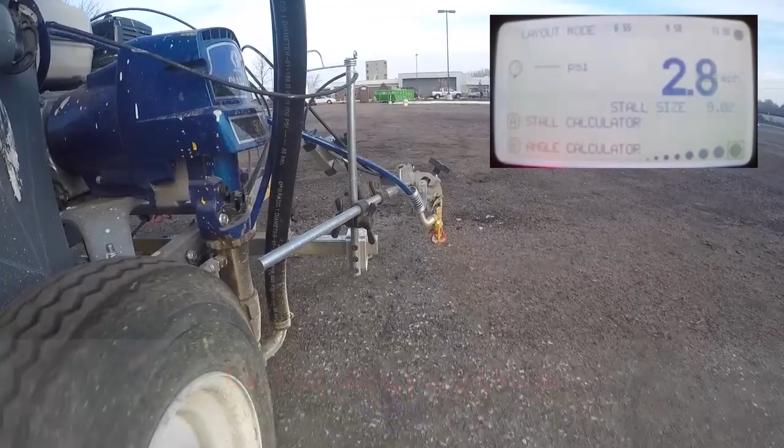Once again, we're using the laser to keep it perfectly straight, so our ends look like you use stencils to paint them - perfectly straight ends.

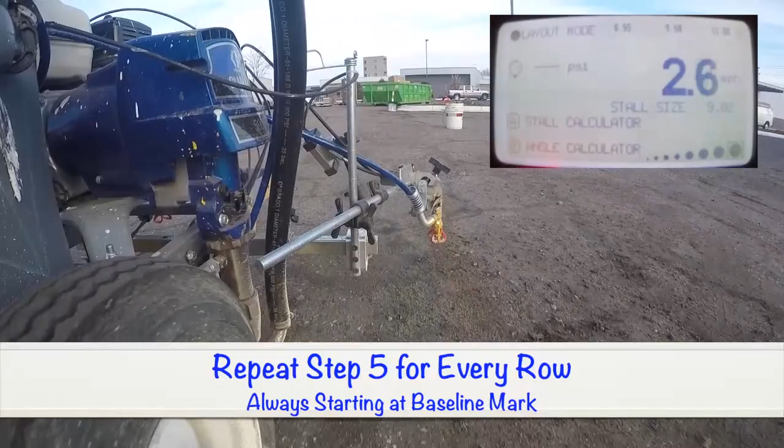And you can see we're laying out at 2.6 miles an hour, probably about the same speed as walking. I don't like to go too fast because then your marks start to get a little bigger.

The key where it really saves you time - if this row was 700 feet long, you could put that box 700 feet away and lay out that entire row at one time, then zip back to your starting point at 10 or 11 miles an hour on the driver and do it all over again.

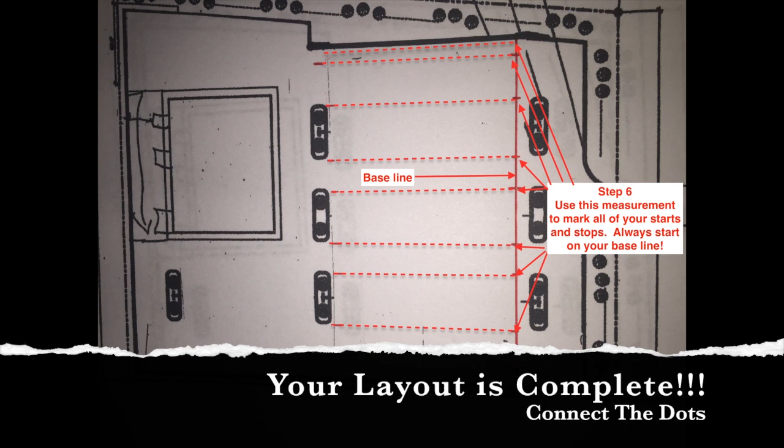So on bigger jobs, the 30 to 60% time savings we're telling you about could actually be upwards of 75% time savings. Every job is going to be a little different in every application. You have to use it and get comfortable with it. But all the auto layout is, in a nutshell, is an electronic tape measure - it takes all the human error out of your measuring.

Line drivers - we're going to touch on this a little bit. We've talked a little about the electric line driver already. It's 50% faster. By the end of the day, if you're working a 10, 12-hour day and walking all day long, you're slowing down. I know you may think you're not, but I guarantee by the end of that long day, you're slowing down.

So it's probably 50% faster, less fatigue. The line driver doesn't slow down after walking. The quality of lines - the more tires you have on the ground, the straighter that line's going to become. We've got 5 tires on the ground keeping a nice straight line, easier to control.

Increase in productivity - your line driver doesn't get tired after a 10-hour day. I know from experience that I do.

Drive it everywhere. If you're in a parking ramp, we have enclosed trailers so we can't get our equipment into a parking ramp. So you can park at the bottom, drive up the ramp, and if you run out of paint, you quick zip back down.

You're not walking up and down parking ramps. You're not, in a large parking lot, parking in a central location. You can park your truck one time and never have to move it again until you leave the job. Happier employees too, your workers are going to be much happier if they're not walking all night.

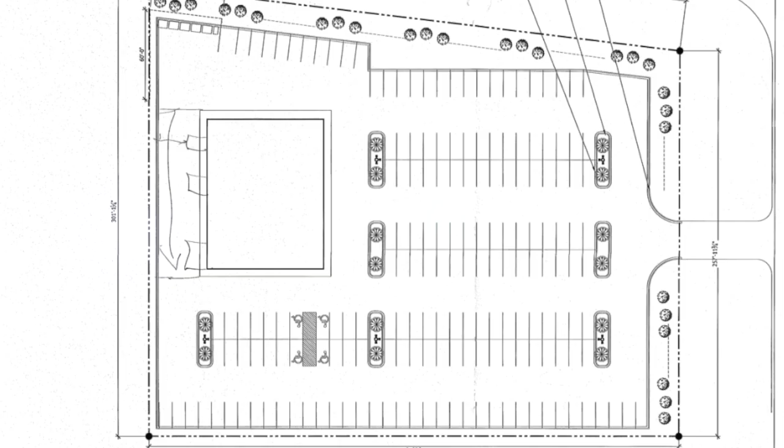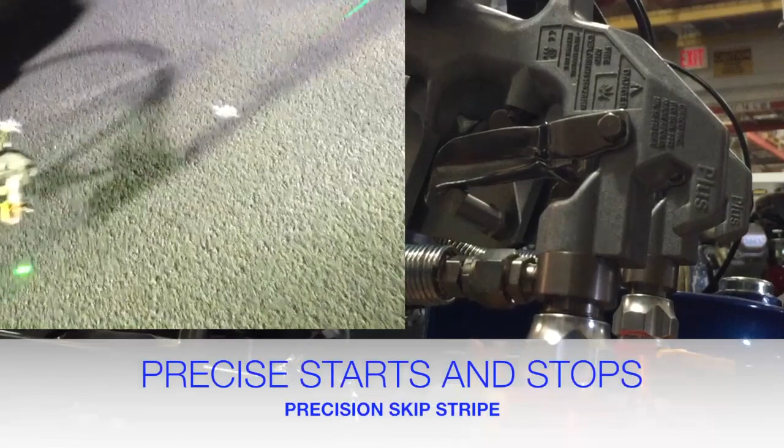Here's a quick video. Now we're going to walk through how to lay this out — we already covered laying out this job. Now we're going to show you the way we actually laid this job out using the auto guns, using some of their features to cut our layout time down by 75%.

In this example, they wanted a 3-foot line with a 3-foot gap, set up for temporary car parking in a bus lot, and that's how it turned out. If you had to lay that whole thing out manually, it would take you a lot longer. Instead, you just turn on the machine and let it do the work.

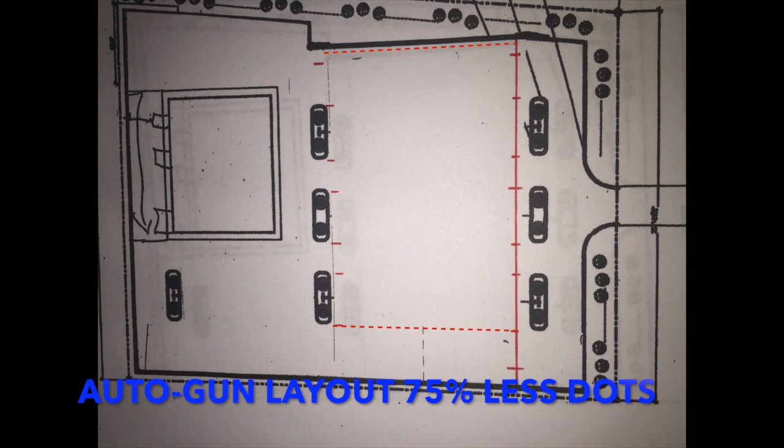So here's our traditional layout — we had to put dots down on every single row. This is what we cut it down to using the auto guns: we only had to mark the very first row and the very last row, mark our 9-foot stalls, then set the gun up to paint a 36-foot line with a 24-foot gap.

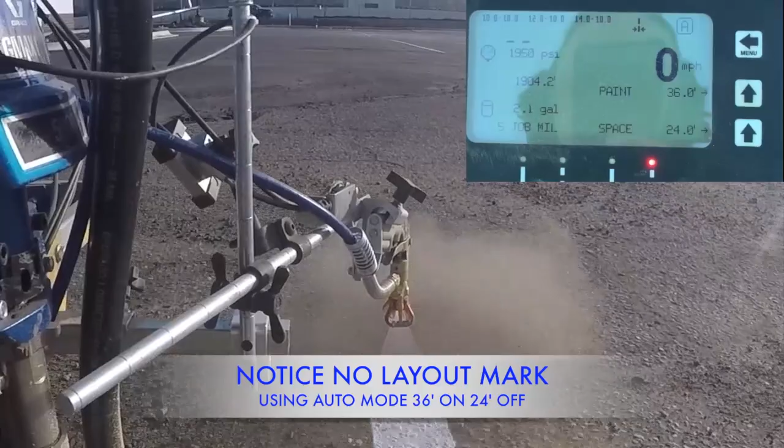Push the button and start, and you'll notice there are no layout marks as I'm painting this. I'm watching that target on the far end, and the machine is turning the gun on and off as I go. As you can see right here, there's no start mark and no auto layout mark — the machine turns on and shuts off automatically, measuring as it's rolling.

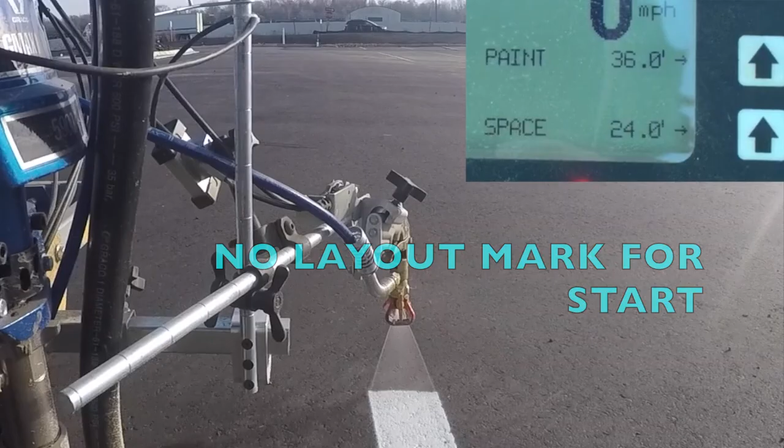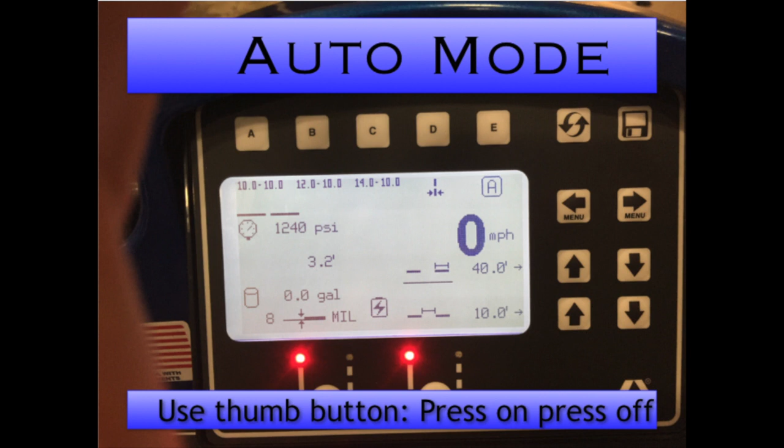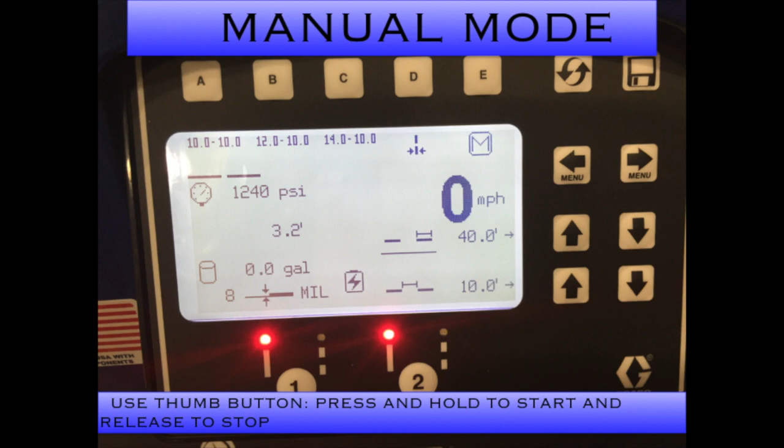Here's the 3 different modes of how the auto guns work. You have auto mode, which is the mode I use most prevalently. Push the button, the paint turns on. As you're painting, when you roll up to your stop point, you push the button again and it turns the paint off. Really simple - push it once, turns it on, stays on until you push it again. Manual mode is a lot like what people are used to with the old mechanical trigger. You press and hold the button when you want to start it. When you want to stop it, you release the button. Real simple - press and hold, and when you release it, the paint stops flowing.

The next one is semi-auto mode. Whatever number is set, say 36, you put whatever number you want in there - an 18-foot line, 36-foot line, whatever it is - it's going to automatically paint that distance and stop. You got to press it again to start it. So whenever you want to paint a consistent length, maybe going up to a building or wherever you need it, that's what you do. Put it in semi-auto mode, hit that button, and whatever measurement you tell it to do, it'll do for you.

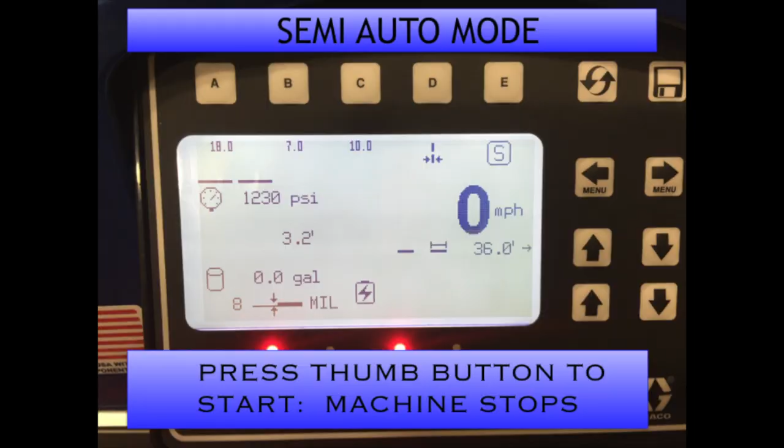Apps and data logging - you're able to download, you can plug a thumb drive right into the LineLazer. Download all your job quantities from the day, from the week, from the month. I think it'll store up to 50 jobs at a time. It'll give you your paint volume, how much paint you've sprayed on stencils, how much paint you've sprayed on lines, your footage, your mil thickness. You can print that out, plug it into your computer and get a nice printout and see exactly what you've been doing.

Google Earth is another app that I don't think we could live without anymore. We bid jobs off of it, and we use it to get layout on jobs that have been overlaid.

The other one is time card apps - we use it all the time. You pull into your shop, it's going to hit you with a reminder: hey, don't forget to check in. When you leave your shop, it's going to give you another reminder: hey, don't forget to check out. We use that quite a bit.